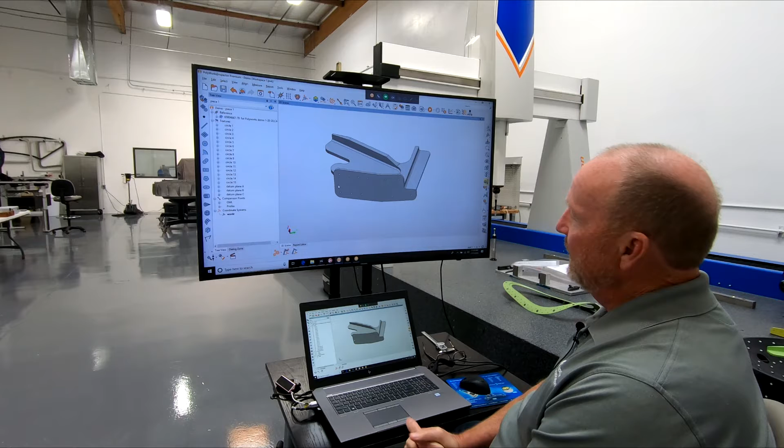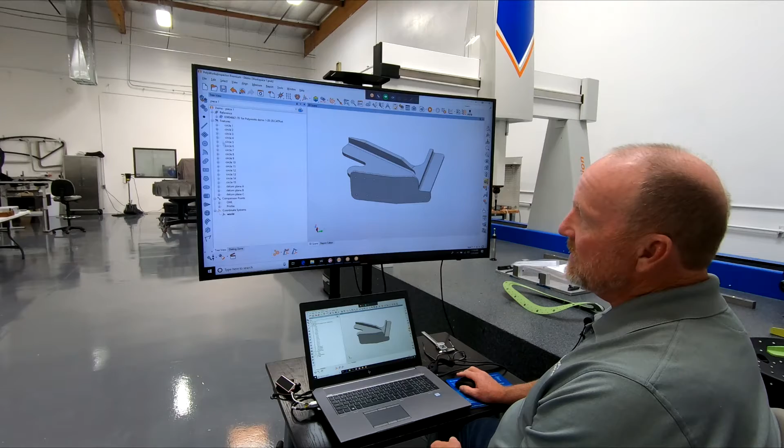Now that we have our part scanned and we have our mesh saved, we are going to bring the mesh inside Polyworks and create an inspection report. Right now we have our model brought in. It's a CAT part. We have the CATIA reader in Polyworks, so we can import directly from CATIA V5 a CAT part. We created an inspection program to measure the pilot holes.

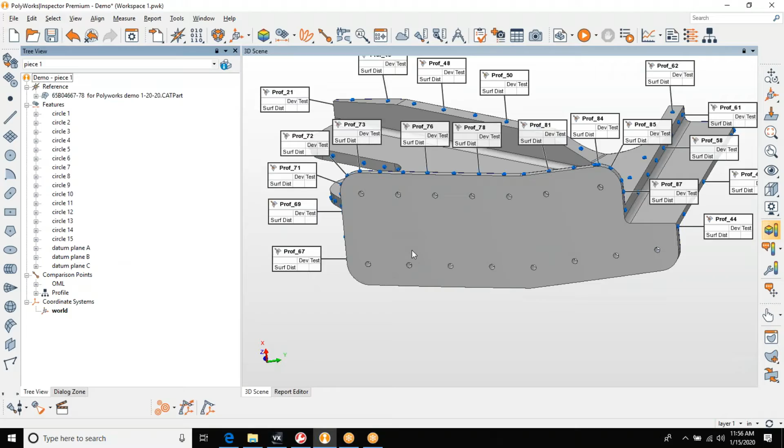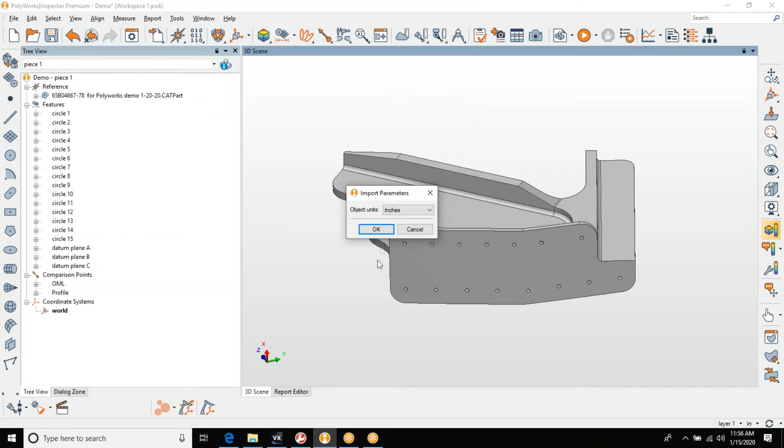The part is all programmed. So at this point, we're going to want to bring in the scan data. So we're going to import the scan data. There's the STL. We're going to import it, and it's not aligned yet. So the next point, we're going to do a rough alignment or a best fit alignment. So we're going to come in here and do a best fit alignment, and that's going to move the scan data on the CAD part. So now we got the scan data on the CAD part.

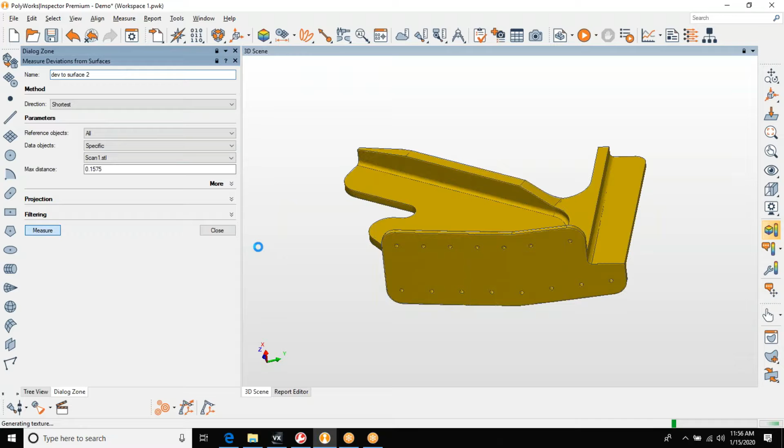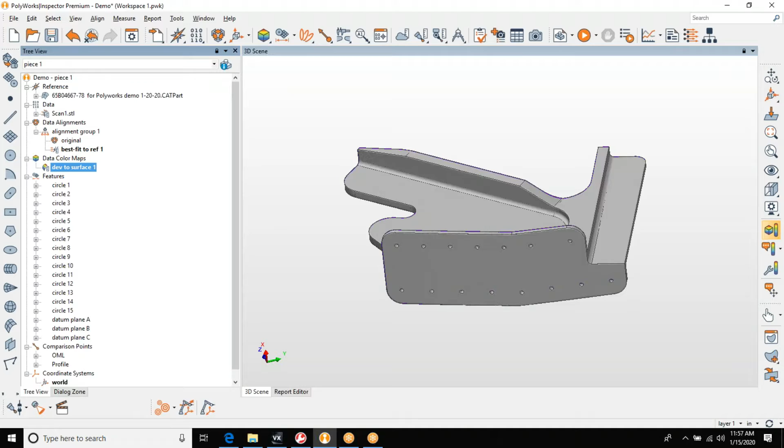Next, we're going to do a color map, and we're going to measure the profile of the whole part to the mesh. And it's looking beautiful. That's all in tolerance. And we'll check our tolerance. Our tolerance is set right now at plus or minus half a millimeter or 19 thousandths. Our tolerance needs to be set to the engineering drawing, which is plus or minus 15 thousandths profile. So we're going to fix that. We're still looking really good. Blue is if it's out of tolerance, plus, red is minus, and anything green is plus or minus 15 thousandths.

We're very good there. Next, we're going to extract our hole information and our datum structure. So we're going to pull all that information from the scan data. And next, after that, we're going to extract our profile and contour points. So we're going to extract that. And then what we can do is we can turn on our holes, and you can see how really close they are in the best fit condition.

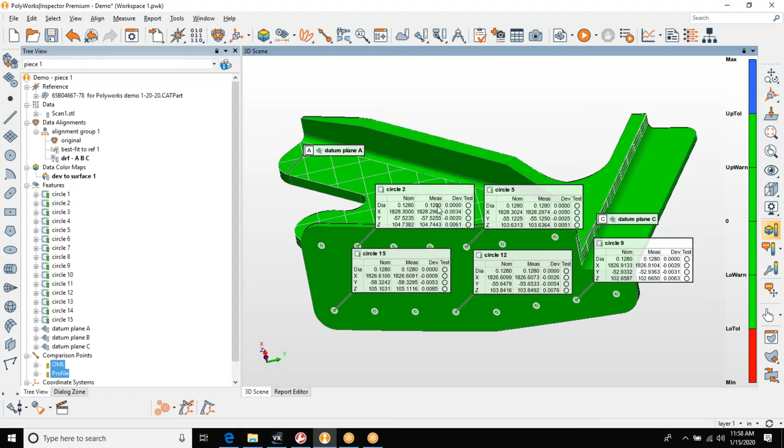But we want to have it in the datum rig. So we're going to run our datum alignment in Polyworks. We already have that all defined. So we're going to align it to the datums. The data is going to move slightly because now we're in a datum alignment instead of a best fit alignment. But you can see the data looks still very, very good. Everything I'm seeing is under 10 thousandths. So all these holes are within 20 thousandths true position.

So at this point, if we wanted to make a report on the hole location, we could highlight what we have, and we could take a snapshot of that, and we could create a report. And our reports in Polyworks are 100% customized. We can write it to a PDF report or Excel report. We can write it to a custom AS9102 report. Very customized. You can do it exactly the way your customer wants to see it.

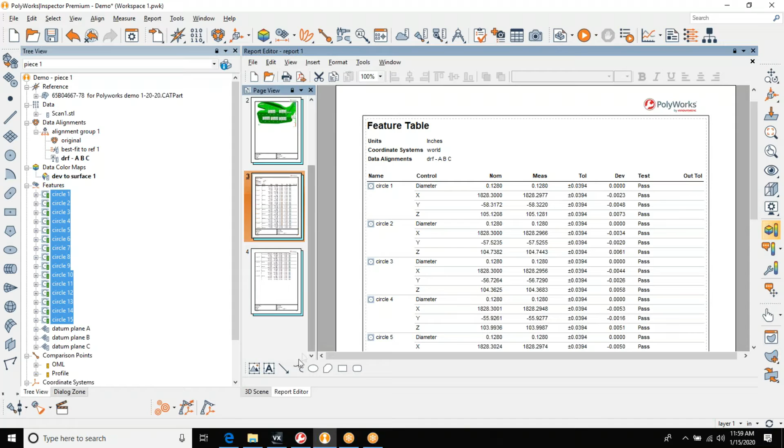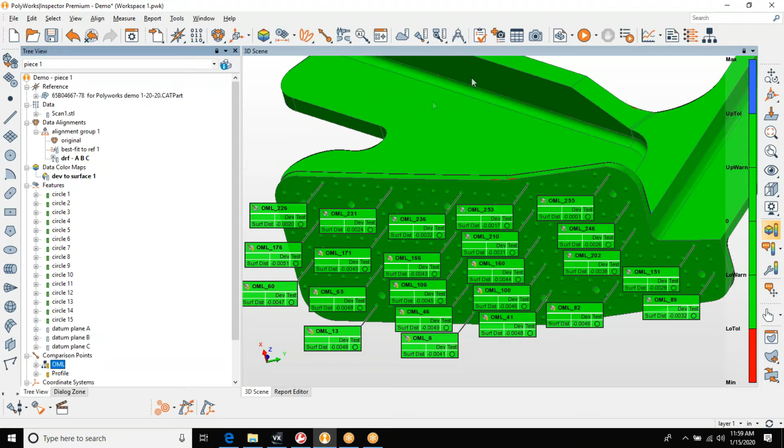So we will turn off the holes, and we're going to turn on the OML surface, and that's looking beautiful too. We're under, I don't even see, we got 5 thousandths, so everything looks like it's within plus or minus 5 there. We'll take a picture of that, and we're going to report that out. So you can see that our report is growing. We got a picture of the holes up here. Now we have a picture of the profile, and we have data, and we're at plus or minus there.

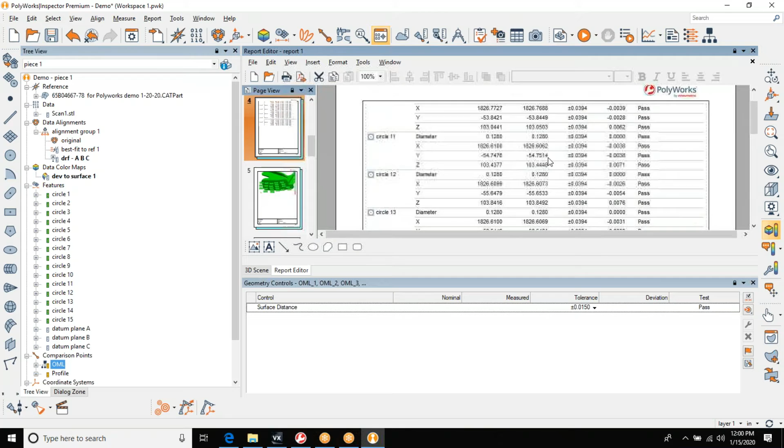Now I see I made a mistake right here. I want to change that to 15 thousandths. Polyworks is very easy for that. So if I take that, I can come in here and I could change that to 15 and minus 0.015 and apply. And what that's going to do is automatically update the report. So you don't have to go back and do anything. It automatically updated the report, and you can see everything is passing. Okay? Very easy to create reports.

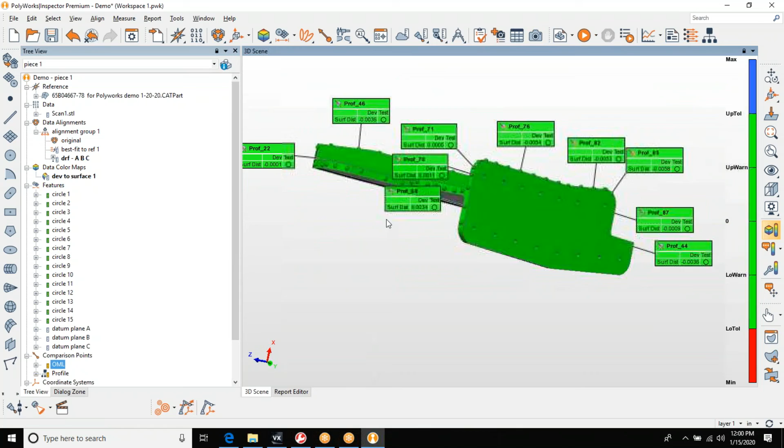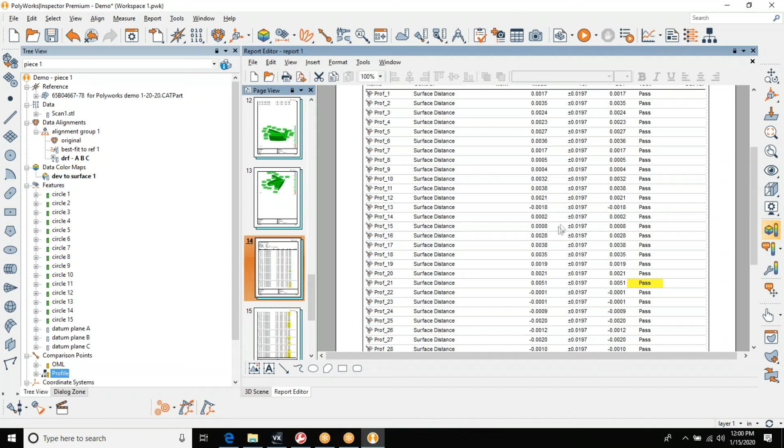So now what we're going to do is turn off the OML and turn on the profile. Let's make sure that automatically followed the same profile, so that's really good. So we can come in here, we can spin this around. We can take several pictures if you want. You can spin it, you can take several pictures, and what we'll do is we'll take the profile and we're actually going to write that in a report. And now we're going to come in here and you can see we have different screen grabs of that, and then we have the report, and these are profile points, and we got to change that tolerance too.

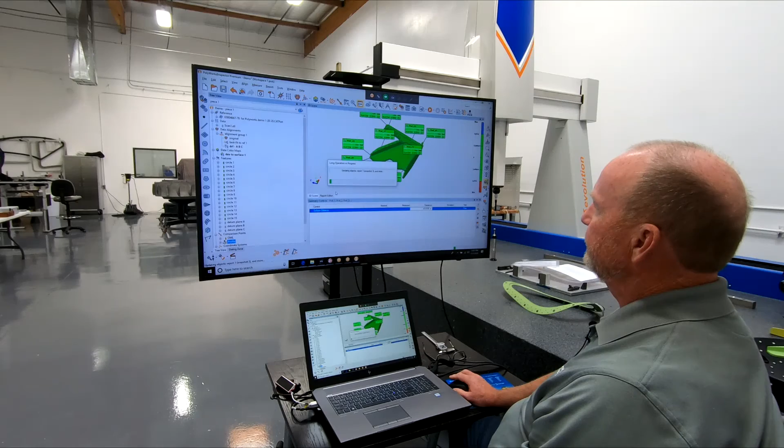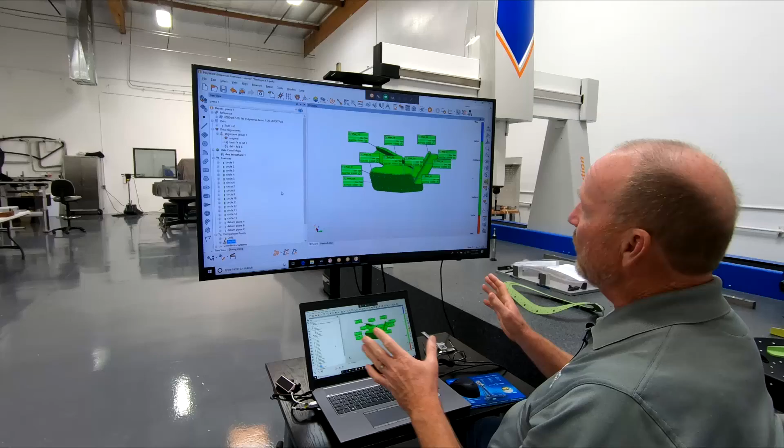So we're going to come in here and pick our profile, we're going to turn that on, and we're going to change that to 15 thousandths also. And now that updated the report on that. So now that's plus or minus 15 on profile. So as you can see, creating an inspection report from scan data is very, very fast in Polyworks. Our data is all scanned within plus or minus 1 thousandths, well within any OEM aerospace requirements for measuring a part like this. We turned a process of maybe a half a day on a coordinate measuring machine into something of probably 20 to 30 minutes in Polyworks.

So this concludes the demonstration on 3D scanning and inspecting in Polyworks from 3D scan data.